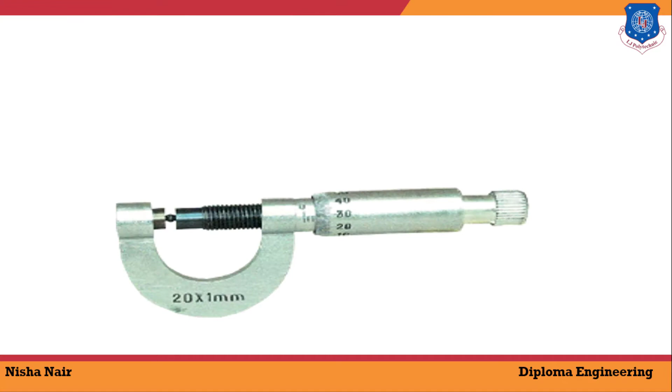In this video, we are going to learn about micrometer screw gauge, measurement using micrometer screw gauge and application of micrometer screw gauge. Now, what is micrometer screw gauge? Micrometer screw gauge is an instrument where measurement can be done very precisely. It is used to measure the mechanical components or to find out the measurement of machine components.

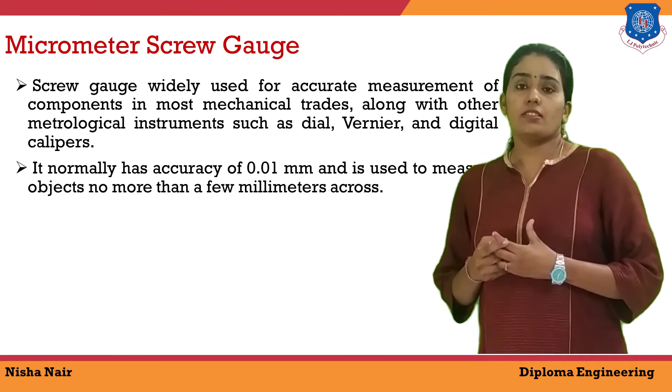It is mainly used in the mechanical engineering field, and the measurement it can do is 10^-6 parts of a meter scale or 1000th part of a centimeter scale. If we have to do measurement very precisely, a micrometer is used because it can do measurement very precisely. So this is the definition related to the micrometer screw gauge.

So next we'll start with measurement using micrometer screw gauge. For that I am introducing the picture of micrometer screw gauge which has been labeled with different parts. Here first you can see a stud and screw, which are the two ends of a micrometer where the object is kept between them and the measurement of the object is done. And this stud and screw is supported with the help of the frame.

As we have seen in the vernier caliper, there are two scales, main scale and vernier scale. Here in micrometer screw gauge also two types of scales you can see. One is pitch scale and another is circular scale. Here pitch scale is connected with screw and ratchet, means it is a fixed scale, it cannot move. And here circular scale can be moved in a circular motion, which is controlled with the help of the thimble. So measurement is done with the help of pitch scale and circular scale, and the object is kept between the stud and screw.

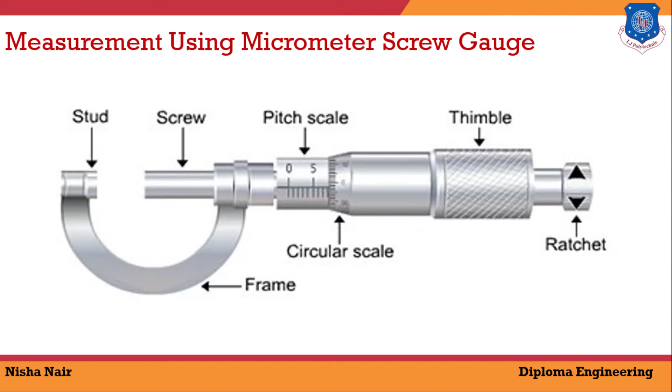Now next we will learn how we can do measurement using the micrometer screw gauge. For that we have to know the least count. As we know, least count is the smallest value that can be measured by the measuring instrument. So we have calculated the least count of vernier caliper in the previous video. Similarly, we can also calculate the least count of micrometer screw gauge.

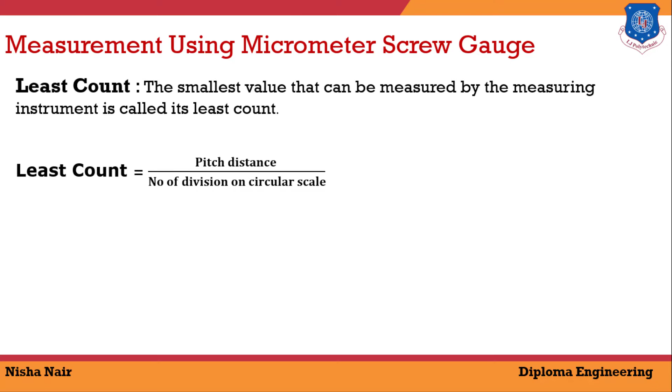The equation to find out the least count of micrometer screw gauge is pitch distance divided by number of divisions on circular scale. Here pitch distance means the consecutive distance between two threads of the screw in the pitch scale. As we have seen, there are two scales in micrometer screw gauge, pitch scale and circular scale. So the pitch distance is divided by number of divisions on circular scale, then we will get the least count of that particular micrometer screw gauge. So before doing a measurement, we have to calculate the least count of that particular instrument. Then only we can do the measurement.

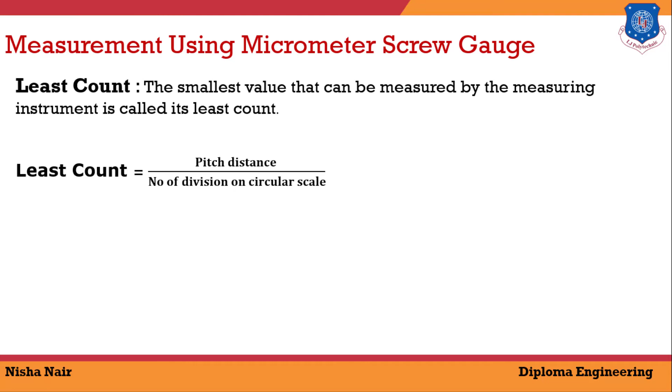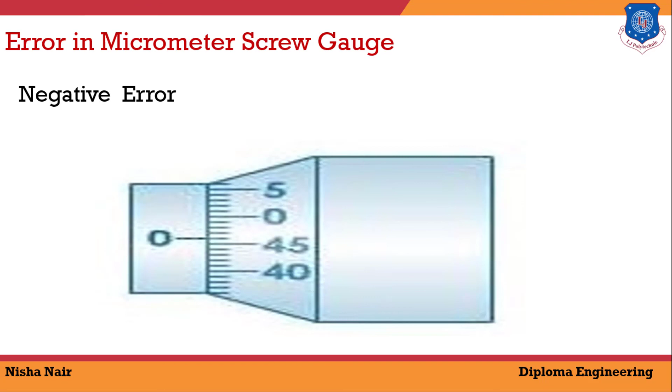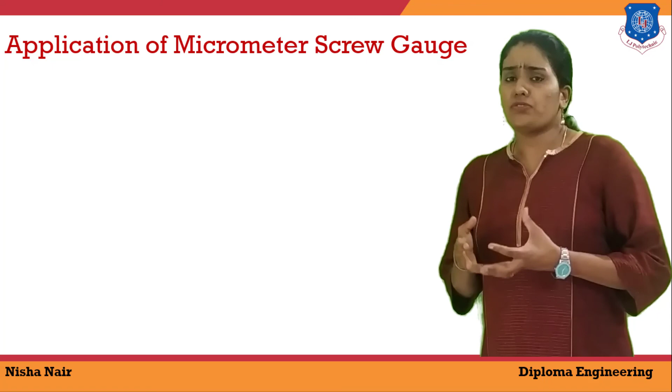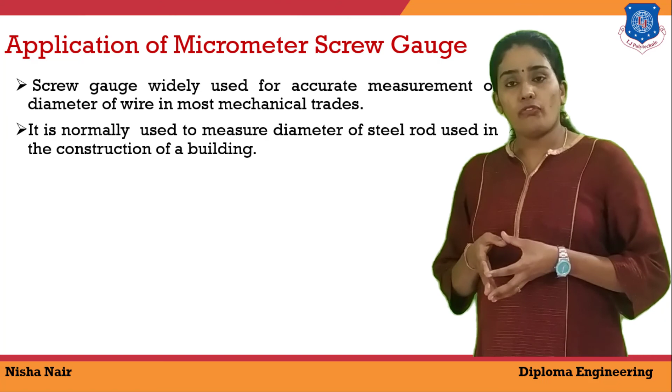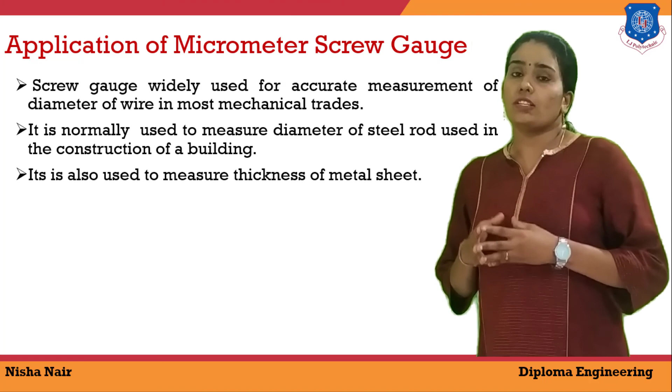Next is application of micrometer screw gauge. First, it is used to find out the diameter of wire, which is mainly used in machineries, etc. Second, it is used to find out the diameter of steel rod, which is used for the construction of buildings. Third, it is used to find out the thickness of sheets, metal sheets, etc., which can be measured using the micrometer screw gauge. So these are the applications related to micrometer screw gauge.